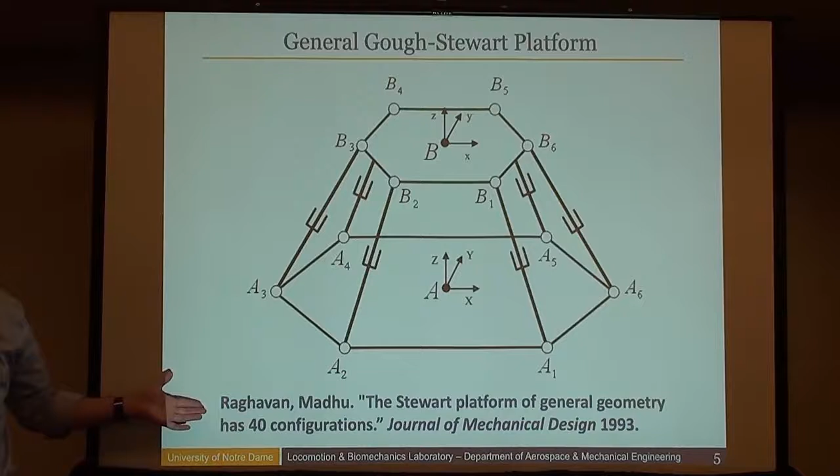So a very well-cited paper in our community, in the modern time, is essentially reduced to an elegant math puzzle. Planar synthesis of finitely separated positions - we've got up to 5 for a 4-bar linkage.

And linkages are great, right? If you're a kinematician, I love designing mechanisms. We're designing for irregular motion. If we're designing for regular motion, we don't need a traditional mechanism - you could do it with a single joint, probably.

And I think Anurag already got to this point of, how many applications exist where I really care that I exactly hit all 5 of these positions? The reality is, exactly hitting these positions is a convenient way of framing the motion generation or function generation problem, particularly a legacy way of framing it, because at the time we originally solved these problems, Freudenstein solved some of these problems.

We didn't have the computing capability that we have today, and so you needed analytical solutions. And analytical solutions are beautiful, and they're elegant, and in many cases they introduce insight to the problem that we wouldn't have otherwise.

And I'm not slamming exact position synthesis - I've done some work like this myself. All I'm saying is, if we as a community are going to require that we hit our positions exactly, we need to be honest with ourselves about what's the engineering benefit of that. And the engineering benefit ought to be, well, I'm designing mechanisms that are more clever or more interesting, or some other better approach that I get out of requiring exact position matching.

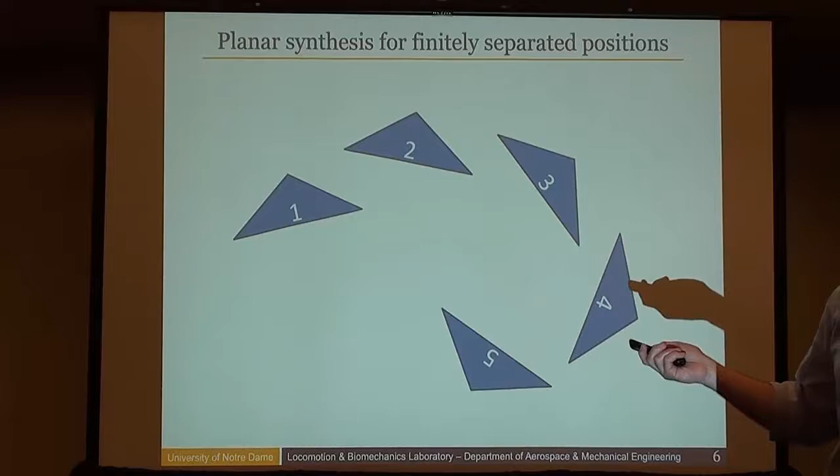Because with modern computing techniques, we can do approximate matching of positions and have 50 of these things and more tightly control the motion we want to generate. There are trade-offs in each of these cases. My argument to you is, in the constraints that you put on your design, make sure those constraints are serving the engineering problem and not just facilitating a math puzzle.

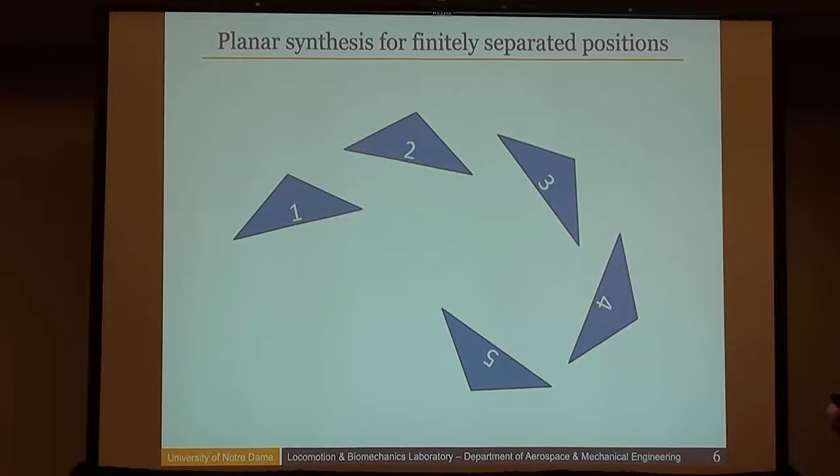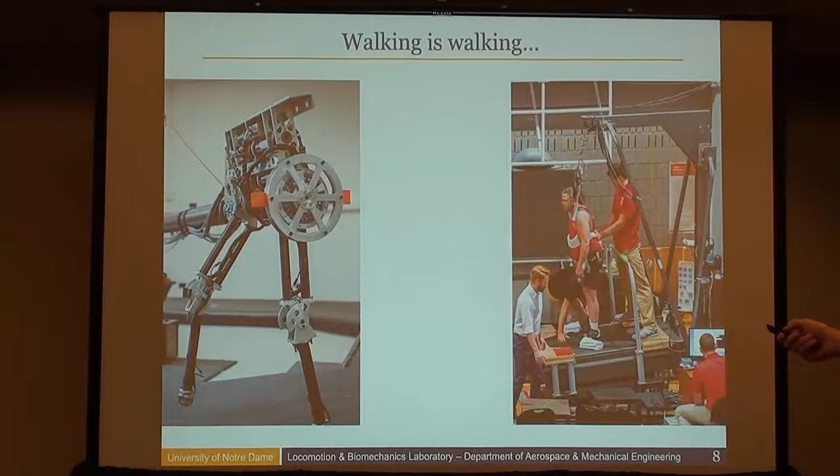Okay, so this is what I want us to think about - a case study within my own work that has nothing to do with mechanisms: walking. I happen to work on walking robots, and I happen to do some human rehabilitative walking, and I happen to work more recently on exoskeletons that nicely bring together robot walking and human walking.

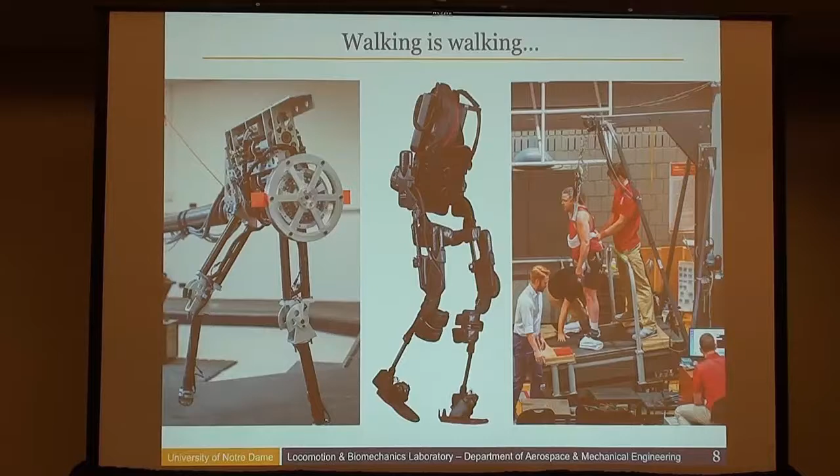And the bottom line is really, walking is walking. The mechanics of walking are what they are, regardless of whether you're dealing with a robot or a person - you're just changing the control system, in essence. And what's the engineering problem of walking? Well, why do we want to have legs?

Legs are good for uneven terrain. So if you don't have uneven terrain, your mobile robot might as well have wheels - or at least if you're not in a human-designed environment with stairs. And so the engineering problem of walking is locomotion over uneven terrain.

Now, it's true that all of us walked into this building and into this room, and the terrain is relatively even, except up here where we've got some cords taped down, etc. And so there are sections of the world that are perfectly flat. But if most of the world is perfectly flat, we should all be on wheels.

And the killer problem in walking is what Avengers gets right. I don't know about you, but I like it when science fiction gets engineering problems right. So the whole trick to Iron Man and the Avengers movies is this little heart fusion science fiction reactor that generates a ridiculous amount of power in a very, very small package. Because the killer problem for any mobile robot, but especially a legged mobile robot, is power consumption.

We want to operate on uneven terrain, and we want to not consume a whole ton of power. Those are basically the two fundamental challenges of walking.

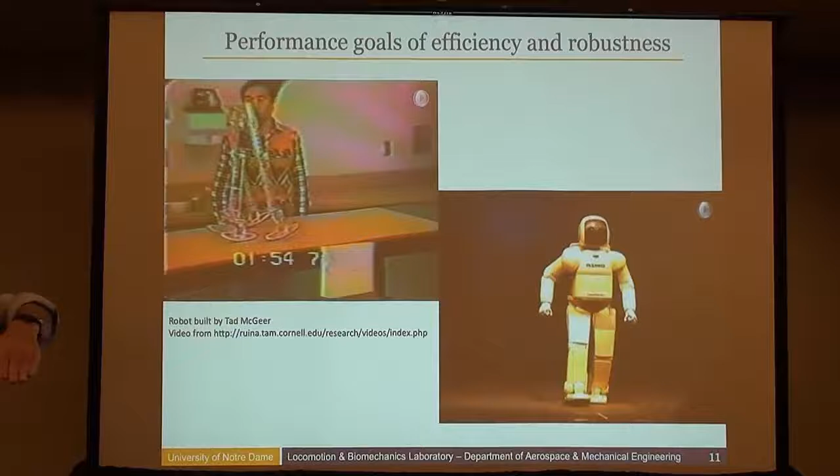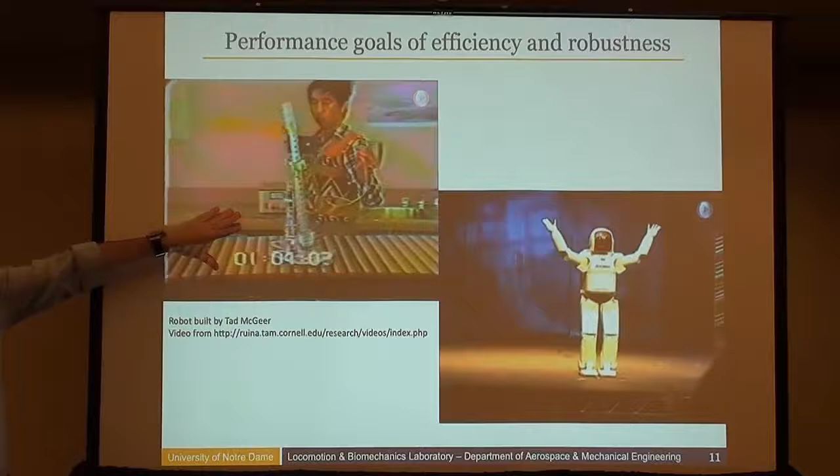History of walking robots: you've got passive designs like this, developed by Tad McGeer. Passive in the sense that they consume no power except walking down slopes, so they consume a small amount of gravitational potential energy. In terms of energy efficiency, they're about the best you can do, even accounting for the potential energy lost. Very, very efficient, but not at all robust. Their disturbance rejection ability is almost non-existent because they have no actuation.

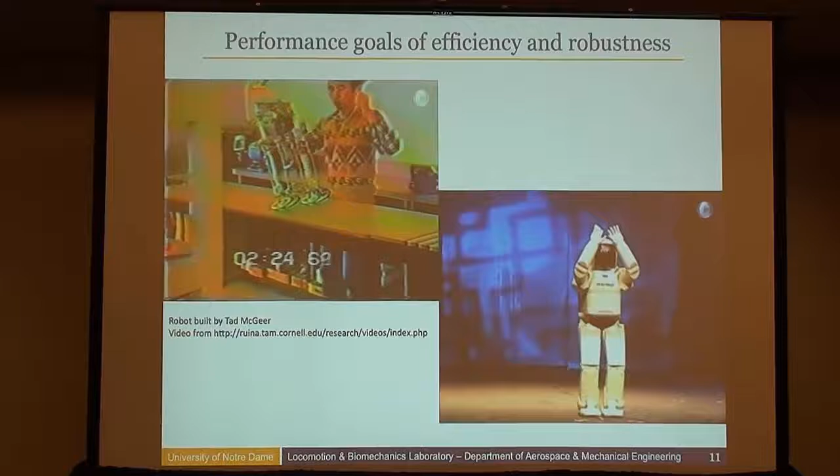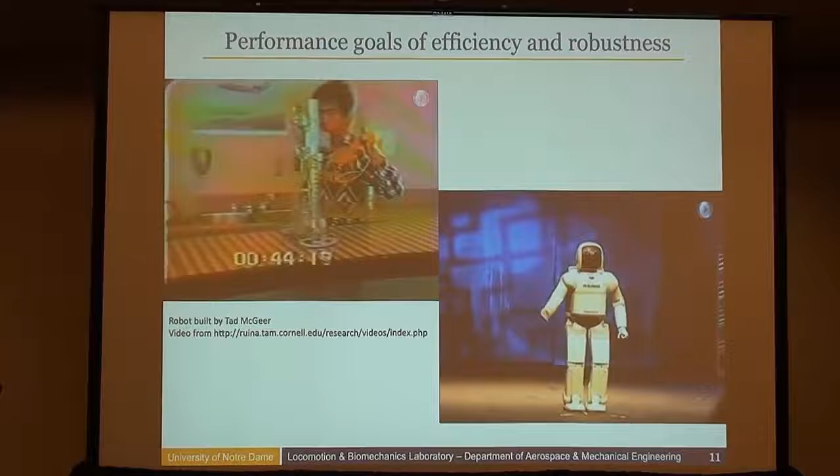In contrast, we have humanoids like ASIMO that are terribly inefficient, particularly compared to human walking, but much more robust than these designs because they've got powered ankles and can reject disturbances. So in terms of how these systems deal with the engineering problems of walking, we have the extremes: super efficient but completely not robust, and significantly more robust at the expense, to some extent, of efficiency.

So we have the passive and then the fully actuated. In my own research, what I've done, and maybe you can sense this from what I care to talk about today, is I'm a shoot-in-the-middle guy. Under-actuated robots have some actuation, but in this case no ankle actuation to provide a torque at the ground. My argument is shooting in the middle, maybe we can deal with some of the efficiency benefits of the passive systems and still get some of the robust benefits of the fully actuated systems.

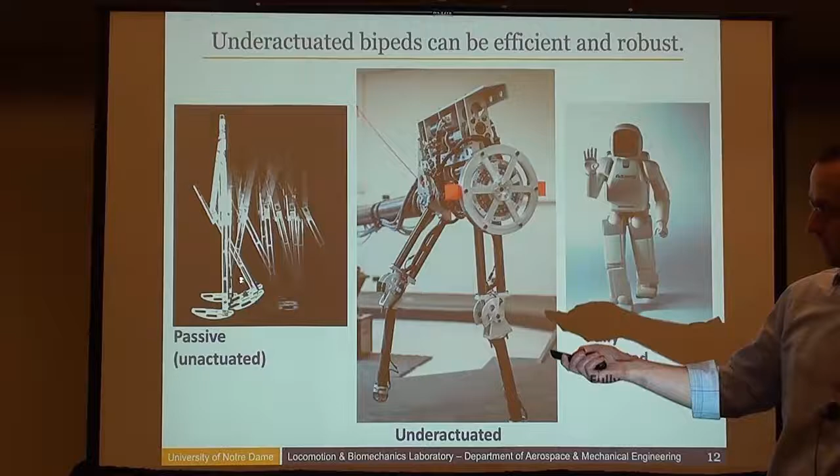The challenge on the robustness side is I know how to define stability relatively easily for a passive system. I can look at the Poincare return map of the inverted pendulum dynamics, and I don't have to worry about the control system, and I can tell you whether the system is stable. And if I have full actuation, including at the ground, I've got an actuator for every degree of freedom. There are a variety of ways I could design controllers that are guaranteed to be stable, or provably stable, within friction limits and actuator limits, etc.

So the challenge is, I'm a shoot-in-the-middle guy. When I'm operating with under-actuated systems, I can't directly use the method of Poincare for a passive system to analyze stability, and I don't have the actuation I would need for a fully actuated system. So I need some other approach if I want to guarantee robustness. And that's where I'm getting at with math puzzles in walking. I don't really care whether I guarantee robustness or not, I just care that the robot doesn't fall over and doesn't consume a ton of energy.

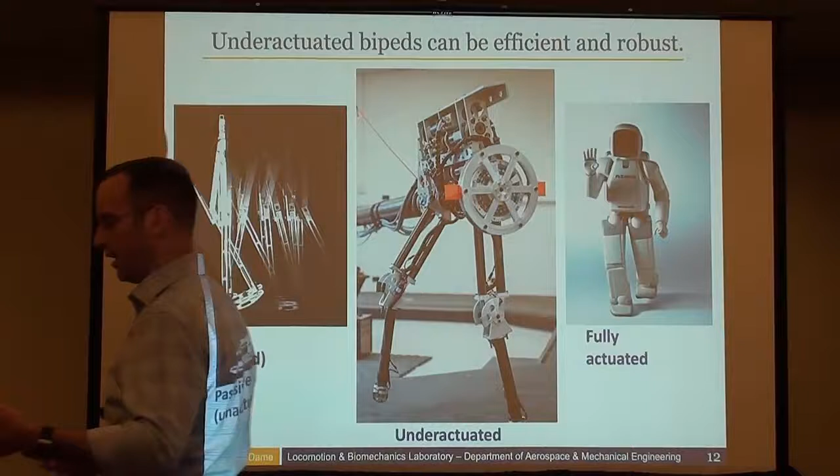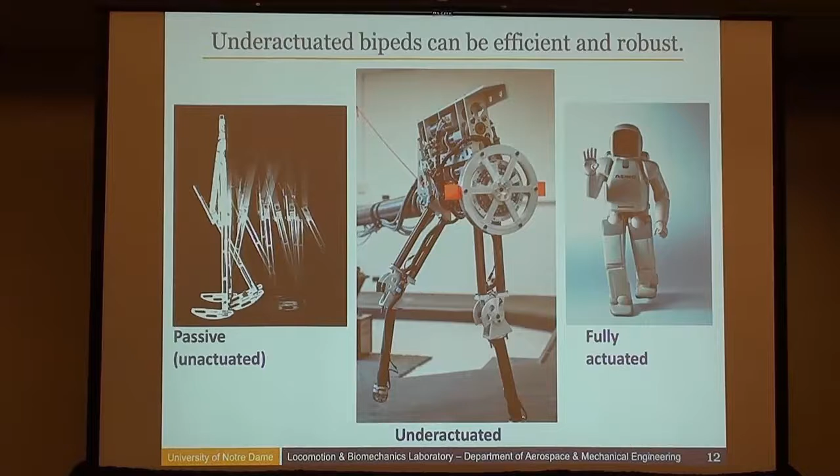But in the same way that designing a mechanism is searching for a solution that meets some performance criteria, in designing a controller I'm searching for a controller that meets some performance criteria. In this case, the performance criteria is the robot doesn't fall over. The math puzzle is, well, if I can prove my controller is stable, I've solved a math puzzle that also contributes to the engineering problem.

So I'm going to start with the math puzzle quickly, and then talk about how we use the math puzzle, but we reject the provable aspect of it, which I think is a similar case study to what we've used in mechanisms.

So, provable stability. Imagine I've got a 5-link biped that looks like this. I said if we had a passive system, I could analyze the stability using the method of Poincare. If I look at this red line from the point of contact with the ground to the hip, that's the passive part of this system. My robot here has actuators at the hips and the knees and no actuators at the ankle. So this theta degree of freedom is what I can't control, it's the unactuated degree of freedom. So if I just look at the red line, that's an inverted pendulum, and using the method of Poincare, I can guarantee stability of the pendulum dynamics.

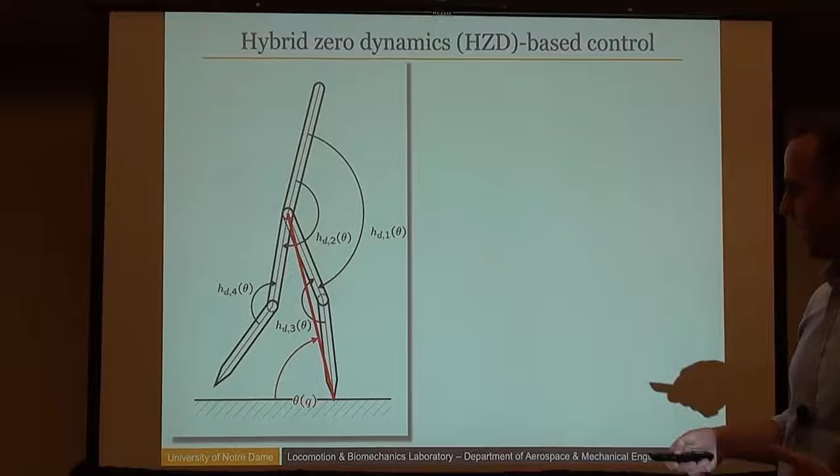So I take my control problem here, and this was originally developed by Jesse Grizzle's group at University of Michigan, and I basically jump through enough hoops to enable my actuated system here to be analyzed for stability only in terms of the unactuated element, the unactuated degree of freedom.

The way I do that is I assume I have continuous dynamics during stance, which is a pretty solid assumption. And then I assume I have instantaneous transfer of support when my new leg touches down, so I have no period of time where both legs are actually on the ground. I have an impact that changes support legs. That's a lie, right? That never happens in reality.

In the same way as when we design our mechanism to pass through five positions and we build it in hardware, it never exactly passes through the five positions. As soon as we go to the real world, there are deviations from the model. And so I have no robot that can instantaneously transfer.

But by enforcing an impact map, continuous dynamics, traditional form, impact map, change in velocities without any changes, instantaneous change in velocity without any change in position, I can achieve guaranteed stability.

So I jump through the zero dynamics. Basically this means, okay, if I have no errors at my hips or knees, so I control the shape of my robot in the air, the leftover dynamics are the zero dynamics. And those leftover dynamics are the dynamics of theta, that unactuated coordinate, how far the pendulum of the robot falls forward.

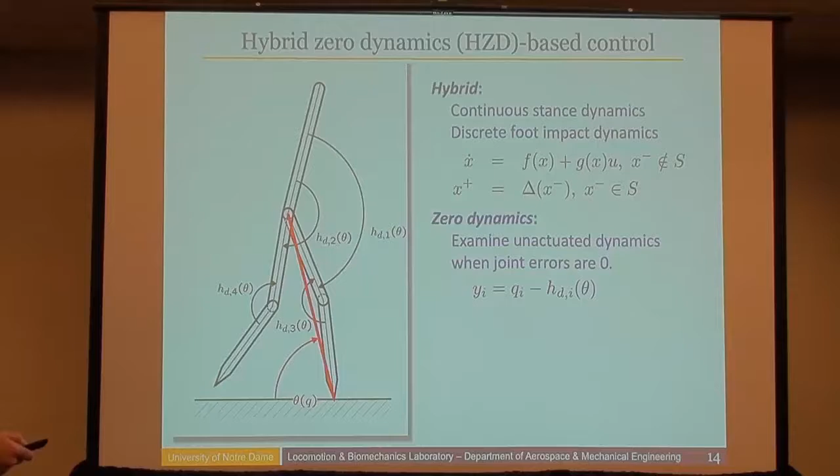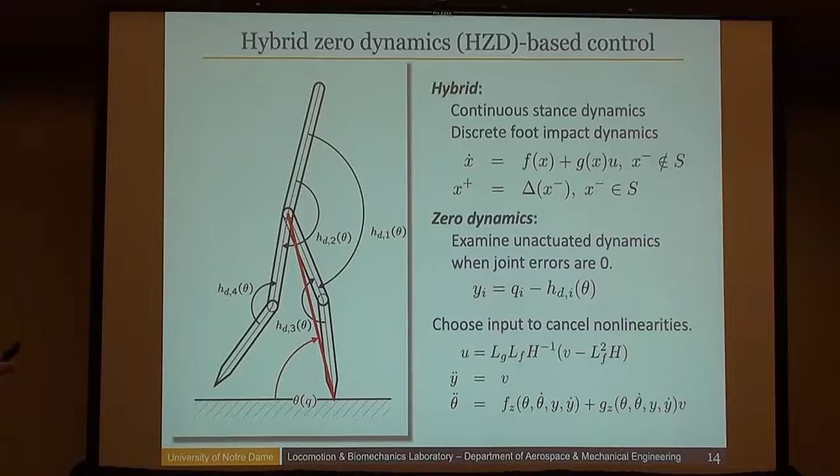And so what I end up controlling is the shape of the robot as it's falling. And if I control that shape reliably, the new swing leg comes in and touches down at the right position for the next step. And it's hybrid because I have this impact map that translates one stance leg into the next stance leg with each touchdown. And okay, we can do some manipulation to cancel the nonlinearities, and you don't really need to know about the mathematics.

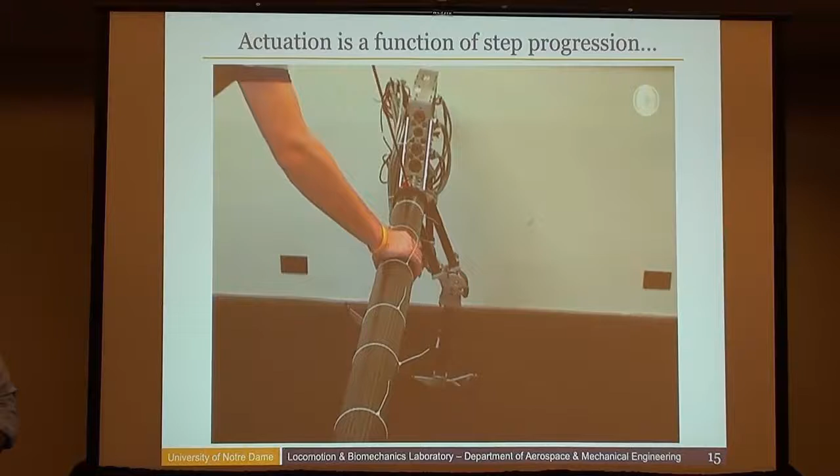The whole idea here is this: actuation is a function of step progression. So as the student pushes the robot forward, the hips and knees are modified to control the shape of the robot as a function of how far that inverted pendulum motion has taken, right? It's not a function of time. This is the same motion played on a clock as if it were a wind-up toy, which it's not.

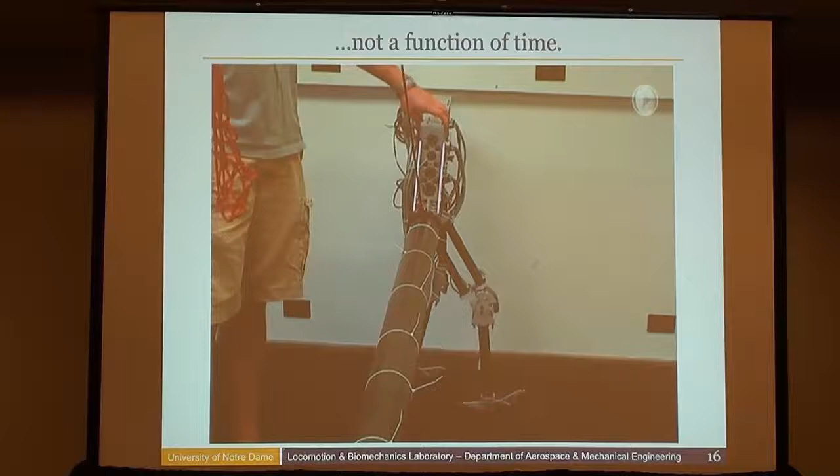And so with this, the idea is I'm analyzing the zero dynamics. So the zero dynamics, if I change the coordinate from theta to this xi parameter here, I plot the position and the velocity of that unactuated dynamics. And you can see here, this curve is the nice continuous dynamics while I'm on the ground.

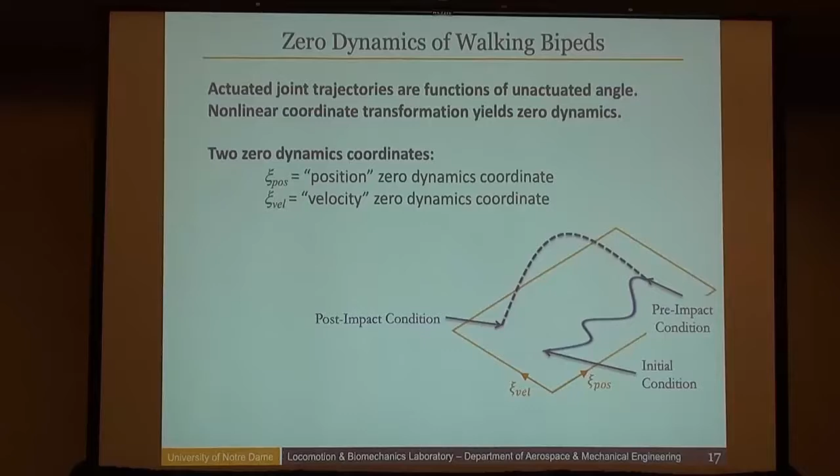And then I have a jump condition where I hit the ground and I have an instantaneous change in the velocity, and the change of position is reflected by the fact that now it's a new leg on the ground. And, okay, you don't really need to worry about all of this, but we go through the nonlinearities and we can make some provable statements.

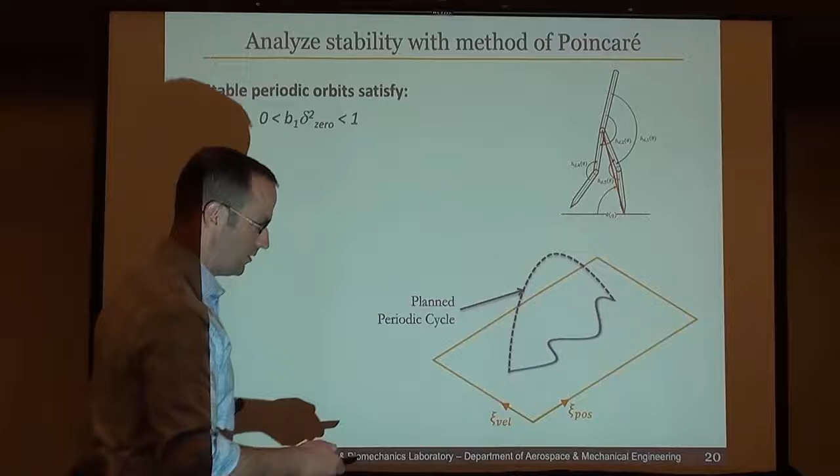And really the important part here is I've got algebraic map, yada, yada. Here's the idea: I've got a periodic cycle. So I take a step, I evolve on my continuous dynamics, my new leg touches down, I bounce back, and if it's periodic, I come right back to the position with the next leg, and I repeat.

And so the stability analysis that we're doing is, well, what happens if I start with an initial condition that's away from that periodic gait? So I'm in light blue now, and we see, I evolve on my continuous dynamics, and then I have my impact when my new leg touches down, and I bounce to a different location. And just as you would imagine, if you bounce to a location that's farther away from the periodic cycle, you're unstable.

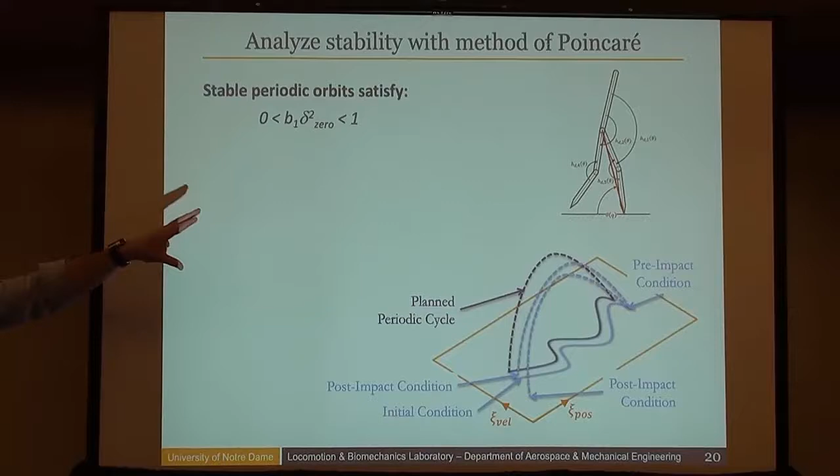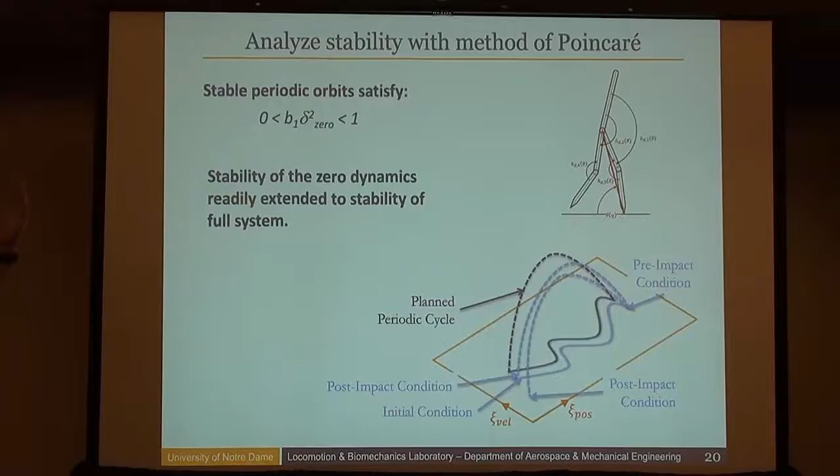Whereas, instead, if I were to bounce to a location closer to my periodic trajectory, I'm stable because my errors are shrinking instead of growing, right? And so we basically can go through the proof of how do I find gaits that enforce this stability under the assumptions of the model. And if I do, then I'm provably stable. And then I can project that provable stability for this simple system up to the full system, which is great.

And the result is something like this. So you can change the size and shape of the foot, and the robot walks in a nice repeatable manner, and you get provable stability.

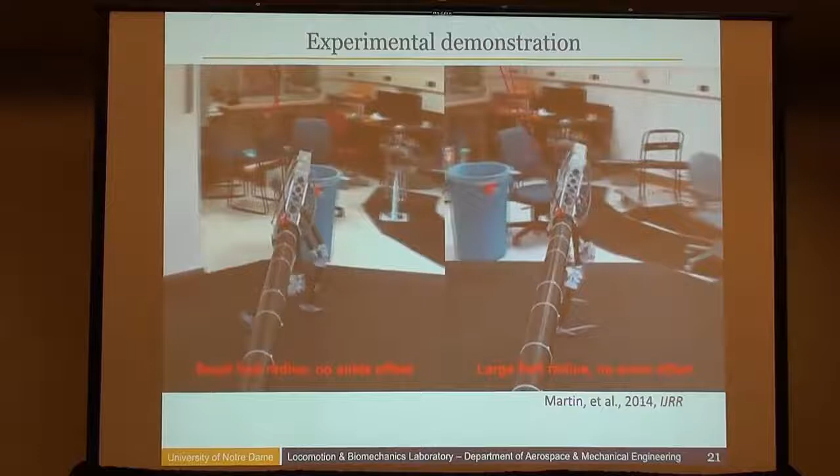Now, what I'm trying to tell you with all this is the hoops you jump through are the solution of a math puzzle. However, in this case, I find it to be a solution of a math puzzle that also solves a great engineering problem, because these controllers, when you put them on the robot, they just work.

And the solution space for all possible controllers that might work is quite large. And it's hard to know a priori, without provable stability, whether they'll work or not.

Here's the problem. I argued to you earlier that the whole point of walking is to be able to walk on uneven terrain, right? As soon as I'm on uneven terrain, I've lost provable stability. And so this idea that a provably stable gait is great because it works - we want it to work as well, and it may be the first cut at a controller that works on uneven terrain.

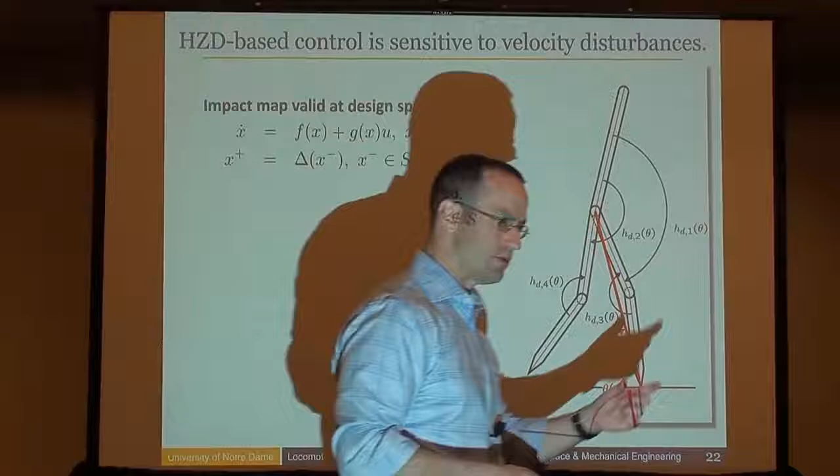But because of the way I frame it, the control strategy is very sensitive to velocity disturbances. Because I designed the gait assuming I'm walking at a very specific speed such that the impact map that represents my transition from support of one leg to the next is valid. If you slow down, that impact map is not valid anymore. And you have no control necessarily over whether the gait will proceed or not. So if you run the experiment in the lab and you put a barrier there and you slow the gait down, the robot risks falling over.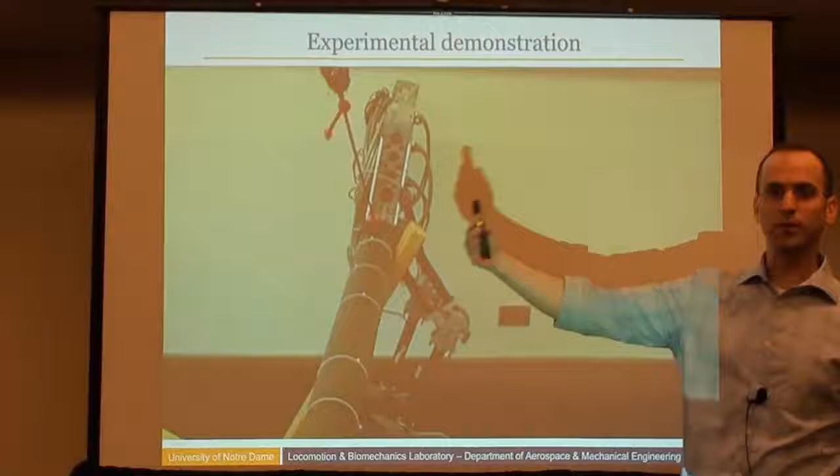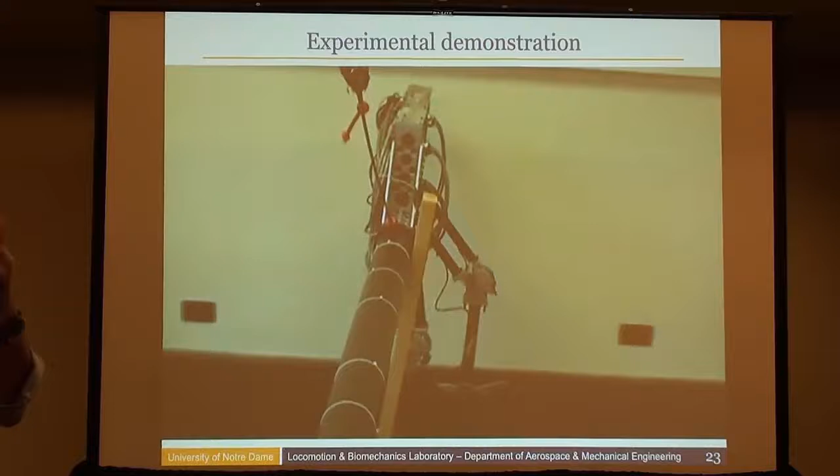And in the slow-mo, what I want you to see is it doesn't fail on the first step. So here's the contact. It completes the next step, but it's on that step that it's moving more slowly than the gait is planned for. And as a result, it can't finish. So it hits the barrier, it takes one more step, and then it can't complete the step after that because the impact map that we assumed is invalid in the presence of this disturbance.

The reason for this is basically there's no feedback on theta dot. There's only feedback on position.

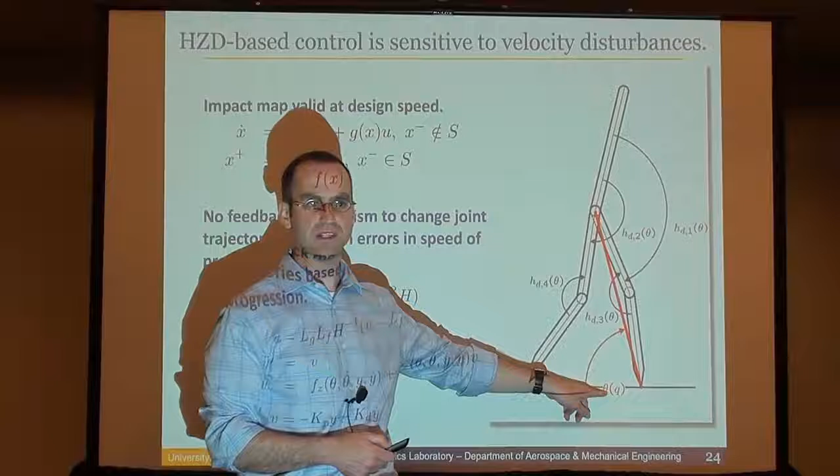Well, we can solve - which drives us to solve - a different math puzzle, which is great because I'm not particularly good at this, but there are people like Russ Tedrake at MIT and now Toyota Research Institute who are really good at this, and Ian Manchester in Australia.

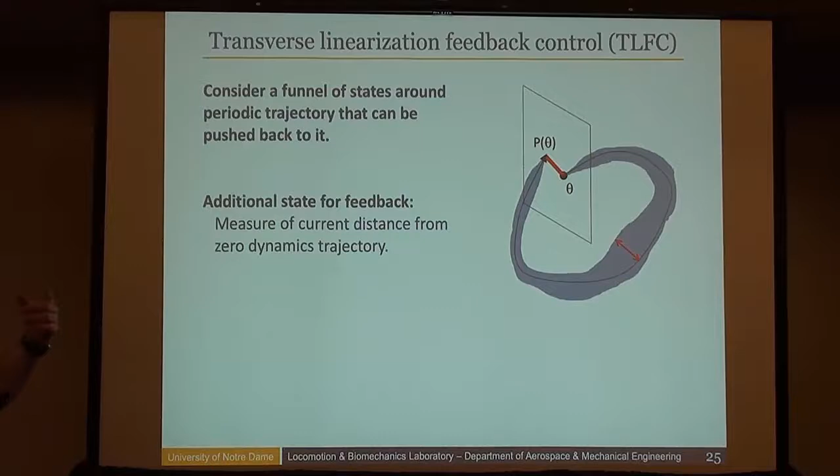And they developed this idea: why don't I provide feedback on the unactuated velocity as well as the unactuated position? So basically now you say, okay, if I think about that trajectory, there's actually maybe a funnel of underactuated states along that trajectory where I can drive myself back to the trajectory, and I just need some feedback to tell me where to go. And so you can do that - and this isn't terribly important - but you're looking for the distance in the theta, theta dot plane, the distance where you are from, say, that periodic trajectory. And that distance we're going to call I.

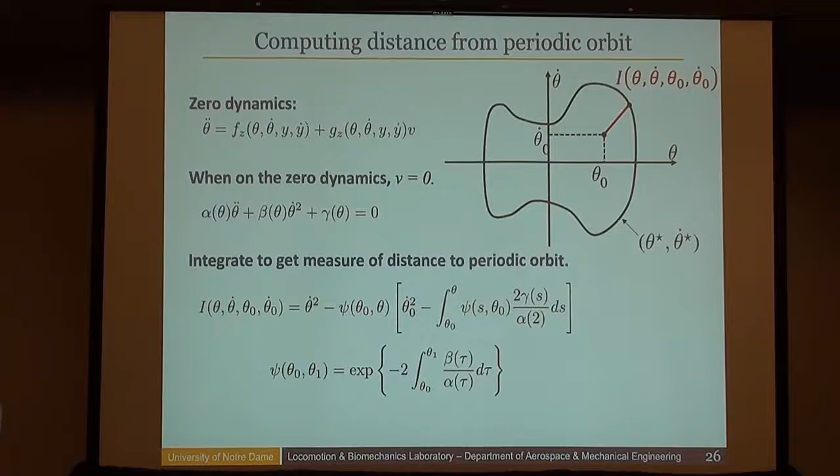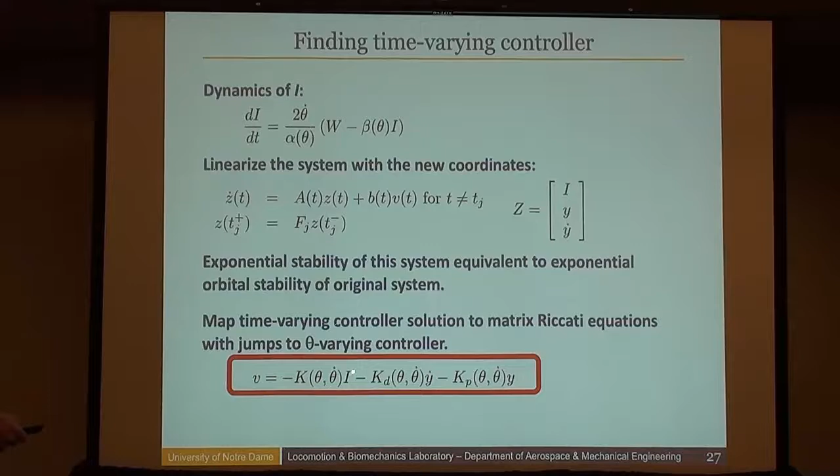And if we have feedback on that, well, now I can solve the more complicated math puzzle of how do I guarantee stability even in the presence of these velocity disturbances, which is great. And so, okay, we jump through, we can do it. And so now, where we had previously just a PD controller, we have a PD plus - and I is not an integral term, so it's not KI. We have a feedback on that.

But that is getting into the realm of truly math puzzle type solutions, because even with the computing power we have today, there's no ability to do a real-time computation of these gains, or even this integral distance to calculate the distance I. You simply can't do it in real time for anything other than a two-link biped. And that's a toy problem. It's a great toy problem. People have built - Tedrake built a two-link rocker that walked beautifully with this controller. But it's never been applied to the experiment, even a three-link biped, let alone a five-link, and that's like on a boom, so we've got to get to 3D.

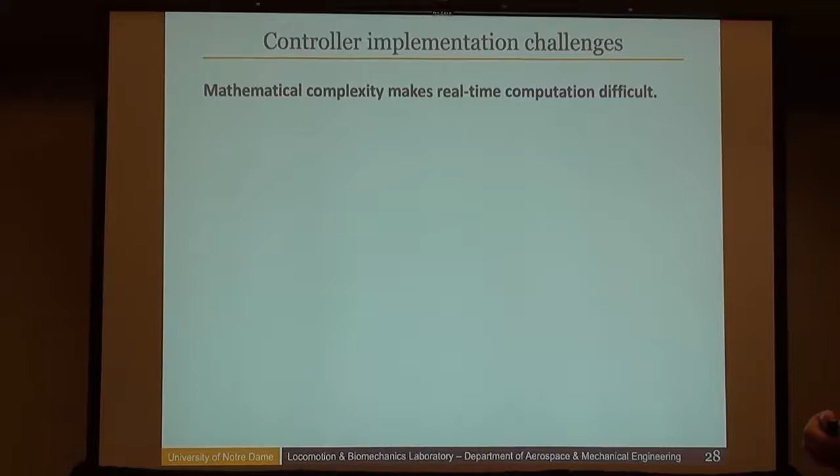Plus, we've got gain scheduling, which means if you don't have a perfect model of your system, your simulated torques aren't going to be exactly the same as your experimental torques. And so now it heightens the importance of your system ID, which is inherently limited, particularly as your robot gets more complex. And then you've got to measure the zero dynamics velocity, which is an unactuated velocity, so you're going to use an IMU or some other remote or non-contact sensor, which means you're basically going to use an observer to get it, and it's noisy.

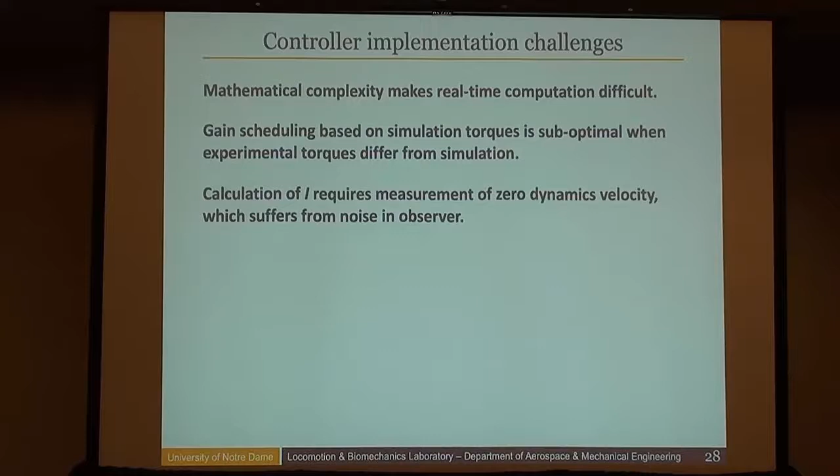Long story short, great math puzzle, cannot implement it in engineering practice. But my argument to you today is that math puzzle is actually really instructive for solving the engineering problem, because you can simulate it all day long, right? You don't care about the non-real-time calculations, so you can simulate it. And so what you do is you say, well, okay, what does the trajectory of the torso do under this control when I have velocity errors?

So in this case, you take the solution of the math puzzle, you simulate it, and you extract from it, well, what's the controller doing? And how do I approximate that with a heuristic?

Well, first order approximation of these changes in trajectories are really pretty easy. So we take the provably stable controller for what it's worth, and then, if you're a jazz fan, I would say we improvise on it. It's the melody of the song, and we do our improvisation on top of that melody. And in doing so, we've lost provable stability.

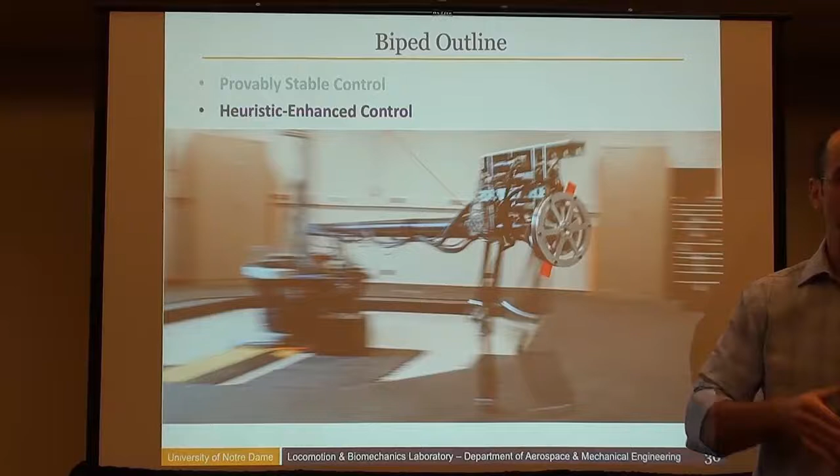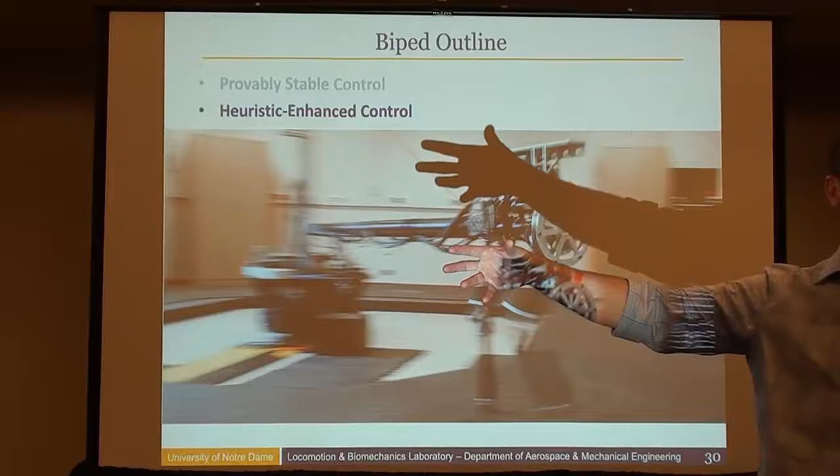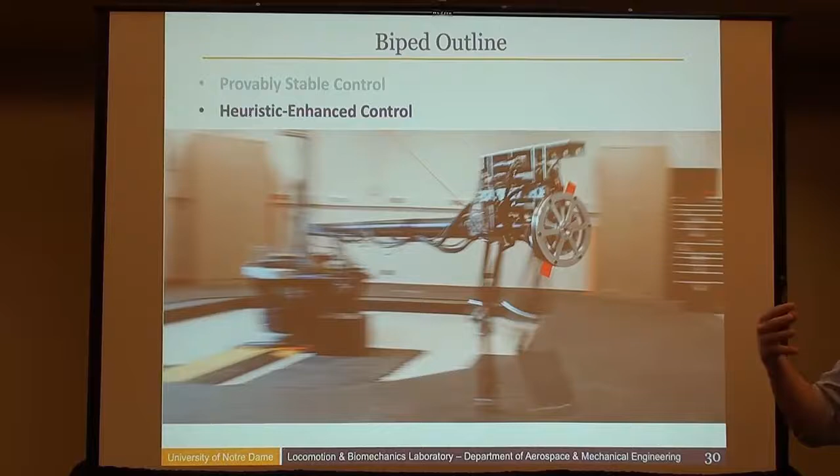In the same way that perhaps in a kinematics problem, we've lost the ability to exactly match precision positions. But I don't necessarily care about exactly matching precision positions. I care about generating the motion that I want. And precision positions might be the handy way of constraining that motion, but as I think Anurag talked about, relaxing some of those positions to get the actual motion that you want, the same thing is happening here.

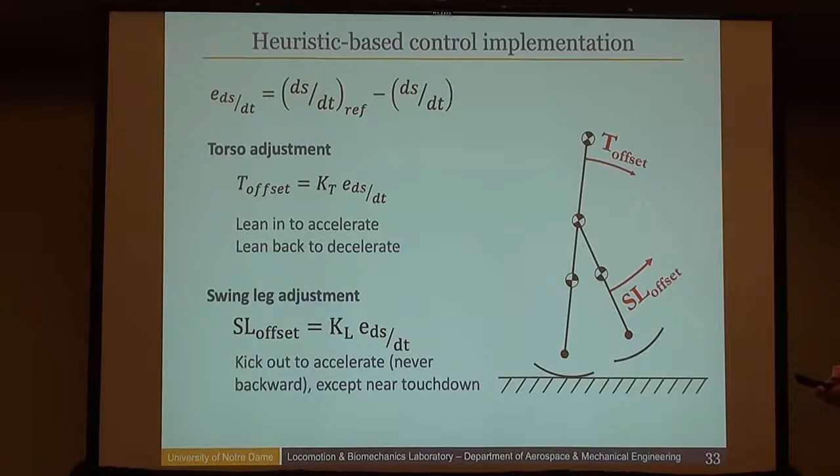So, okay, we solve a different math puzzle to find out what's the feedback that's most useful. You don't really need to care about this, but basically, if we're going too slow, we lean forward and kick the swing leg out. And if we're going too fast, we do the opposite, but we never kick the swing leg backward because the swing leg's always got to come forward at some point to touch down.

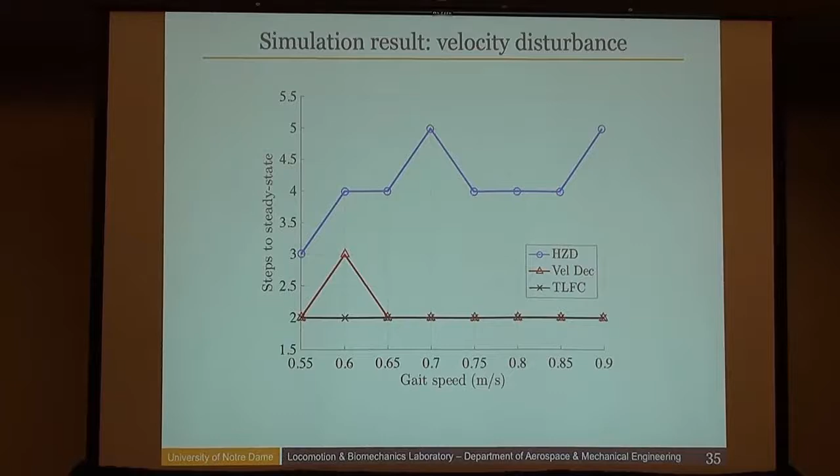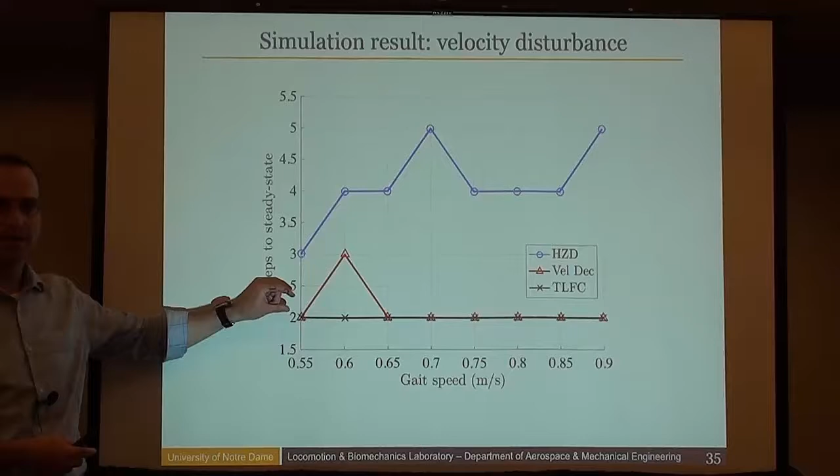And if you want to look at how does it compare across gait speeds, it's the same story. HZD is the worst. Ours is somewhere in between. And the provably stable one here is the best. So what we're doing is we're saying, well, I'm going to seed my control design problem with the principles of the solution to a math puzzle. But I'm going to relax the constraints that make that a perfect solution to get myself a practical control.

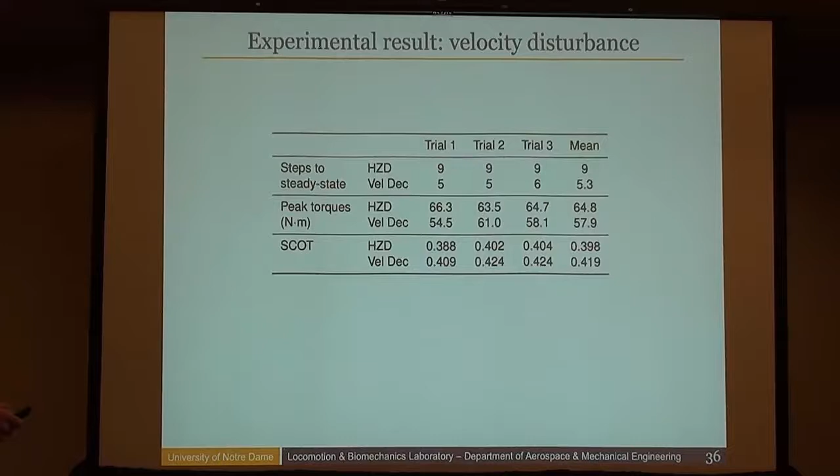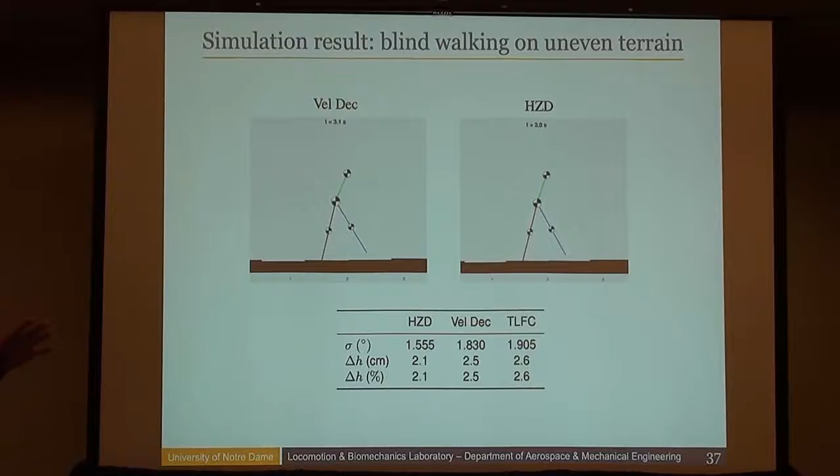Uneven terrain is the whole purpose of legs, right? So the idea here is our new controller is the velocity decomposition controller, and it can overcome stochastic terrain, where you imagine you don't have a vision system that tells you what the height of the terrain is, or you do have a vision system that has a certain amount of error, which is practically always going to be the case. And by improving the torso and leg regulation in light of these disturbances, based on a math puzzle solution, but not formally implementing it, we get better performance.

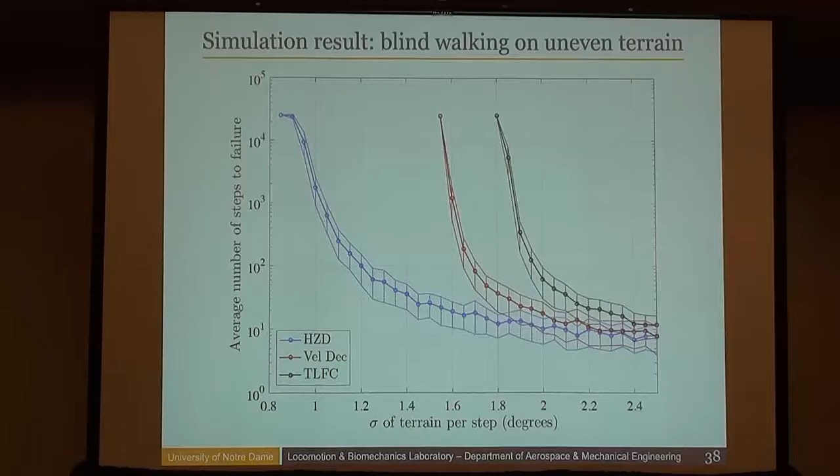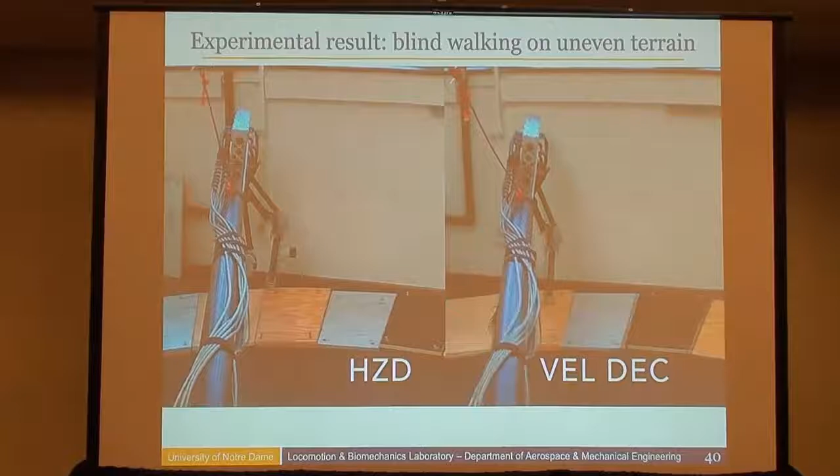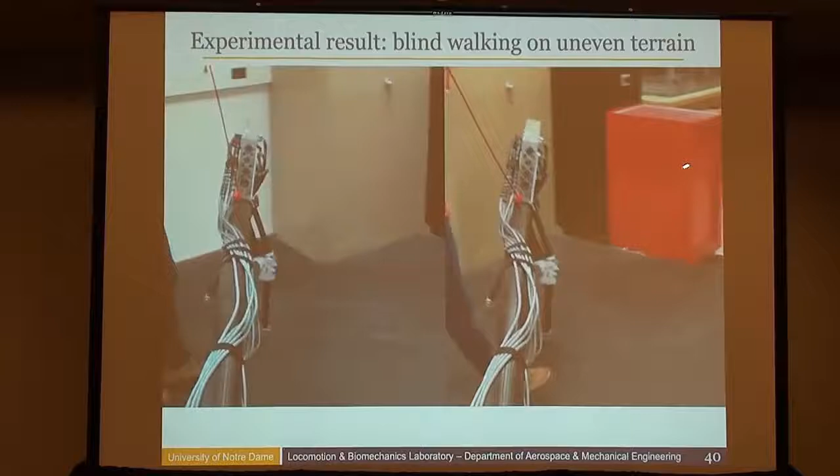And we tried it on different terrain heights, so here's some videos of this, HZD and our approach. Keep in mind, transverse linearization feedback control can't be implemented in hardware. And so what you should be looking for here is there's a red tool chest, and the velocity decomposition hits it much faster, hits it earlier because it rejected the decrease in velocity associated with the steps better than the traditional.

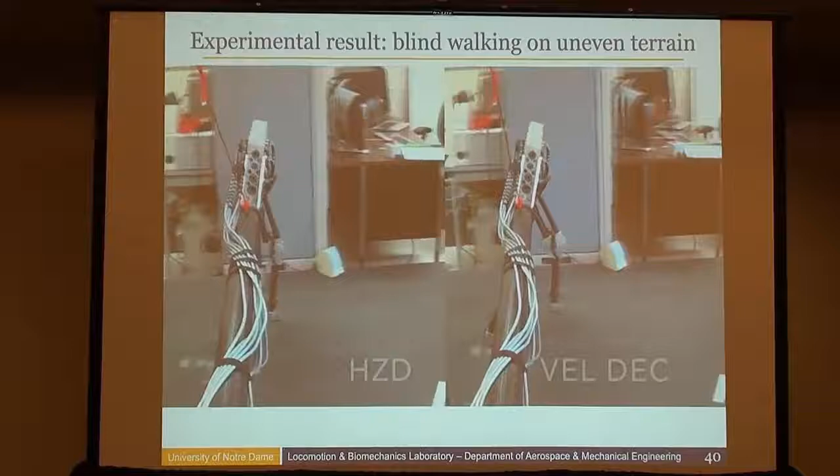If we increase the elevation of those steps, we get to a point where the hybrid zero dynamics controller fails and our better one keeps going.

And if we randomly throw down sheets of terrain height variation and different stiffnesses, again we see the enhanced controller is stable, and it's keeping the desired speed much more reliably than the traditional controller. And you pay for cost of transport.

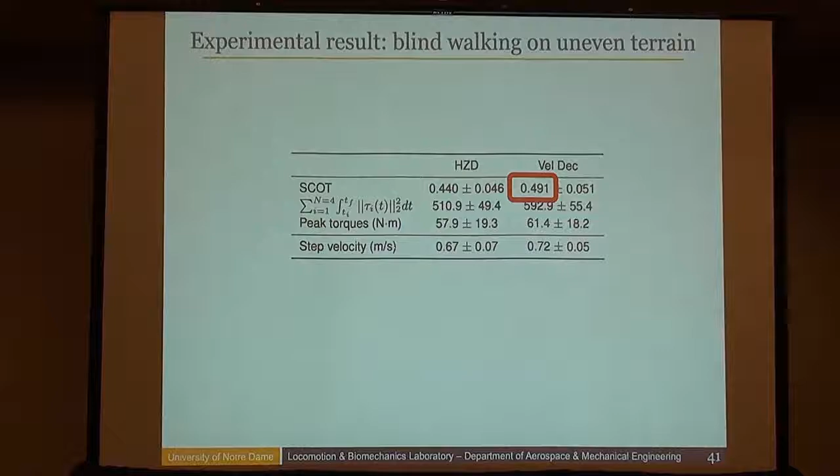So my argument to you is not that math puzzles are bad. My argument is, at least in my experience with walking, math puzzles are really useful up to a point. And where we get into danger with math puzzles is when we're emotionally tied to them such that we're not willing to relax the constraints that allow us to get the solution and use it to inform a real engineering problem.

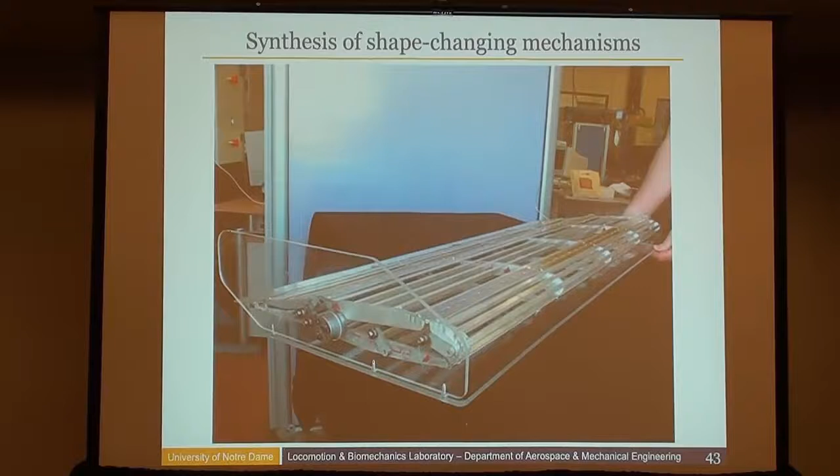All right, so optimization-based synthesis. So how do I do that? Mechanisms. I've been interested in these shape-changing mechanisms for a while, primarily because I think they're a real engineering problem, and that's debatable—you might argue with me. I'm interested in solving them both with rigid bodies and with compliant mechanisms, what have you.

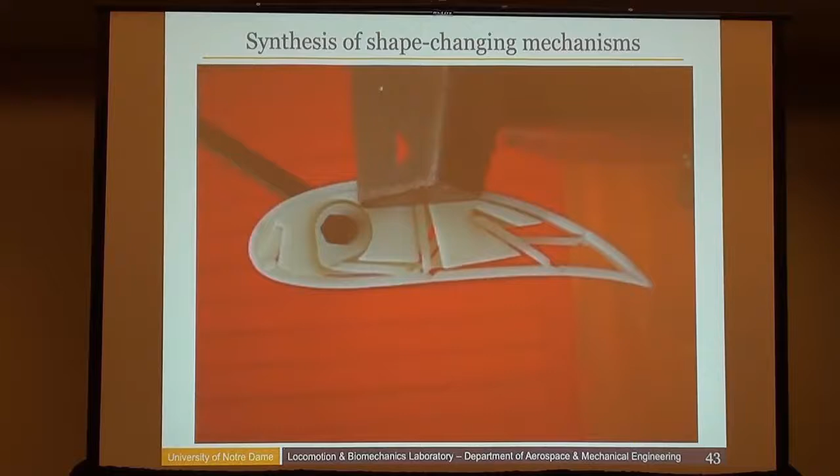And the strategy we've been using has basically been optimization. We don't exactly match any positions, we're just trying to do good enough, and optimization is a handy tool for that.

Specifically, we went to some trouble to find rigid body procedures, and then asked how do we convert and use that rigid body information, because that seems like a lot of information we get—I was talking about the value of data. If we know rigid body solutions to a given problem, that ought to tell us something about the compliance solutions. So we've tried using pseudo-rigid bodies to do partially compliant mechanisms, since that's a pretty logical connection between rigid body and pseudo-rigid body models.

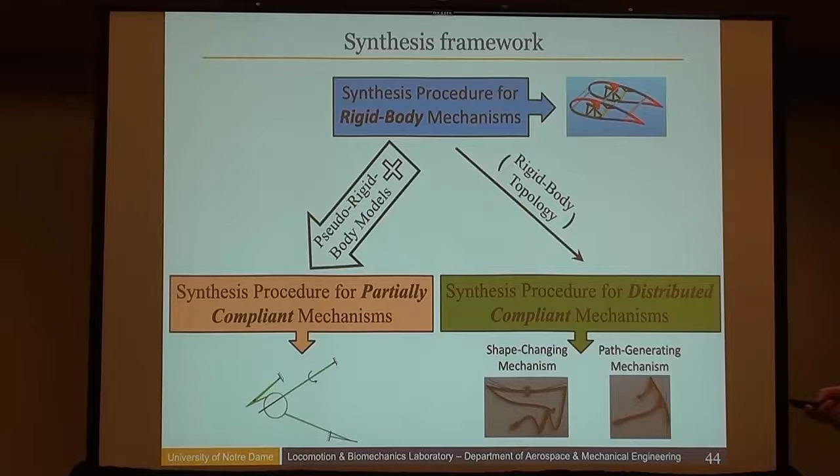We've also used these to generate fully compliant mechanisms. From a rigid body synthesis standpoint, to some extent there's a math puzzle: if I want to match this surface of the mechanism, the green surface, to change its shape, it's possible that surface is entirely in the body of the mechanism with no ground pivots, like an open curve. It's possible it could be a closed curve as part of a mechanism—we looked at morphing dies, so maybe plastic flowing through the middle, or if this were an aircraft wing, fluid flowing around it, and all these links have to be inside.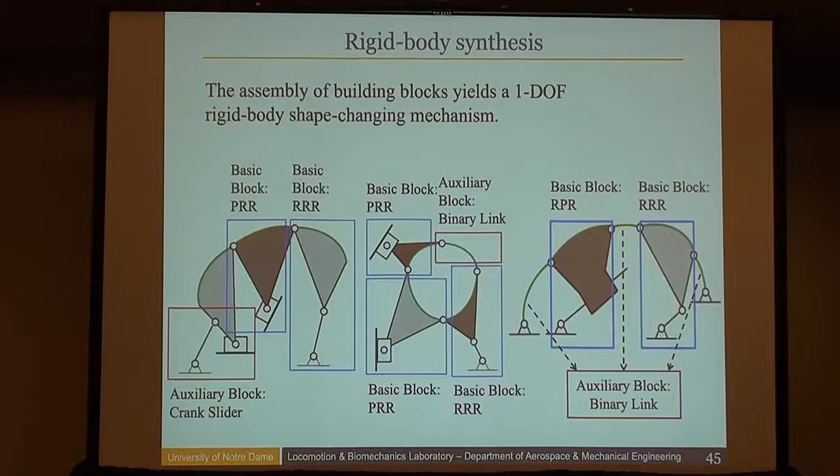But then it's also possible that green surface I want to match is actually jointed to ground. So we looked at this as a math puzzle, sort of a combinatorial math puzzle: what are all the possibilities that allow us to do this?

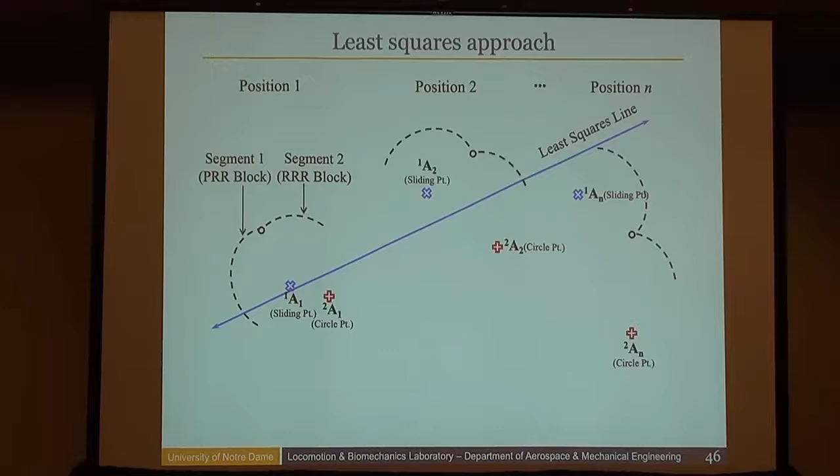In our experience, if you've got 2 points, 2 positions you want to match, and you want to put a slider on, it's pretty straightforward. Then if you want to add another dyad, you can find the center point. What we found was, as soon as we went to 3 positions—3 shapes we wanted to match—we never found good solutions for a slider with 3. So we always just said, okay, least squares solution with 3.

There are solutions—we know as kinematicians there are solutions where I can find points whose 3 positions lie on a straight line. But we found that restricted the design space so much we never got defect-free mechanisms out of our optimization. It's possible they existed, but we never found them.

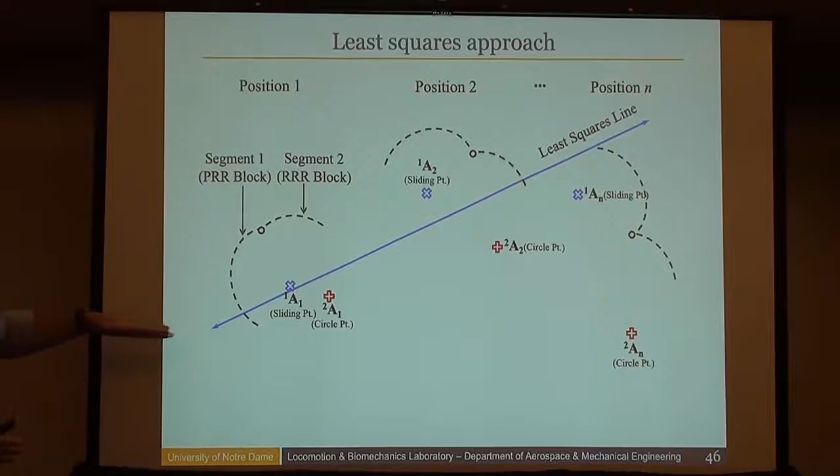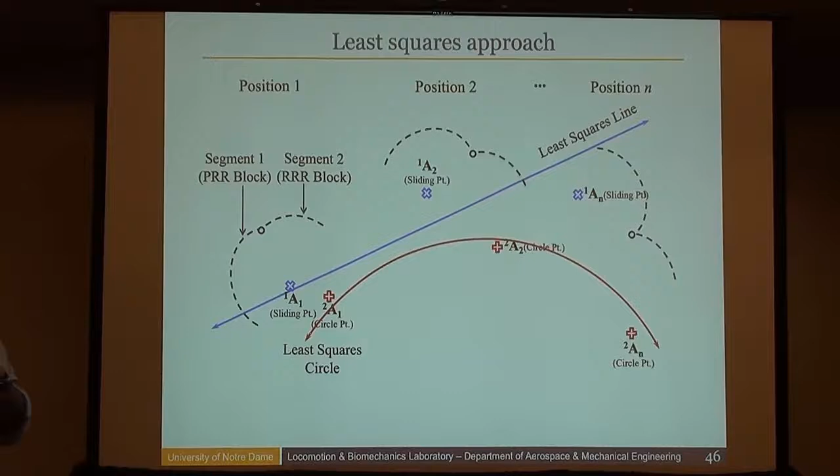So we punted—we said who cares about exact matching, if we have three or more positions we're just going to fit a least squares line. The same thing happened with circle points: with 3 you can always fit a circle, but when we got to 4, we never found good solutions when we constrained it to exactly match the 4. We over-constrained the design space because we were trying to exactly hit them, so we punted to the least squares approach, and it works fine.

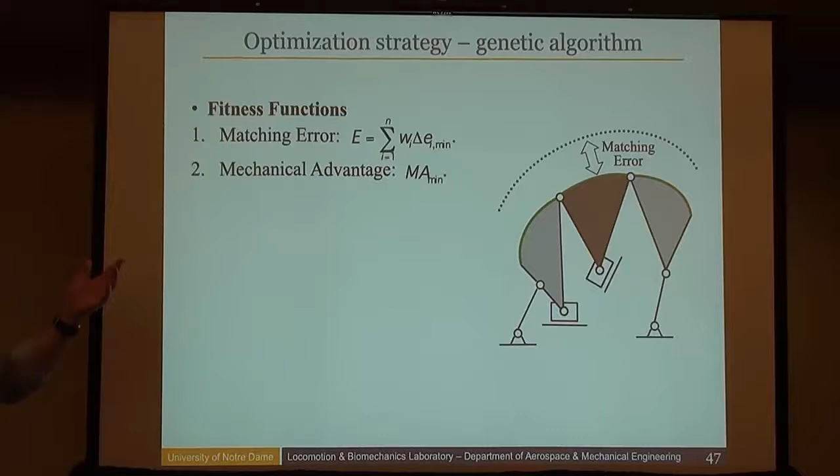So we chose at the time a genetic algorithm, but maybe we'd use machine learning now, or particle swarm optimization, whatever your favorite optimization tool is. We minimized matching error, but we also thought about mechanical advantage—how much torque you need from your actuator to resist a load—and that's convenient in any optimization framework. So we chose our GA to have a chromosome that contained all the information in the design. That's great.

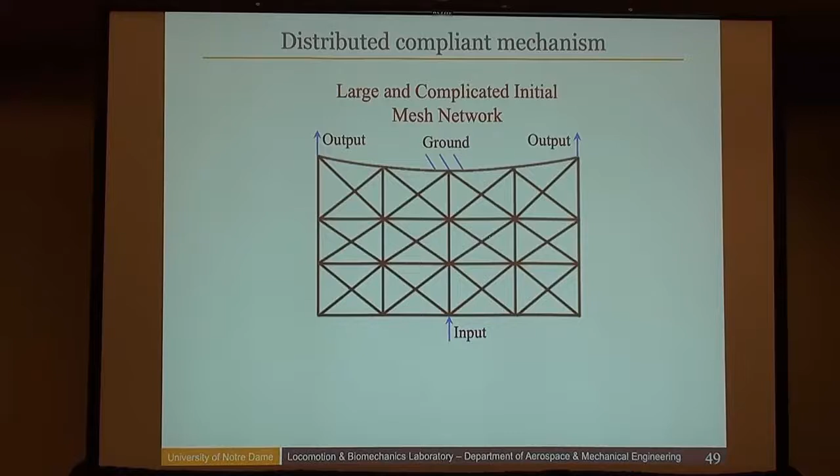We basically discretize the design space so finely that we rarely allow the node locations to move, because it becomes an overwhelming optimization problem if we have a huge number of variables and their positions are changing. As you get more and more of these, not only does the computational cost go up, but now you risk converging to a local minimum.

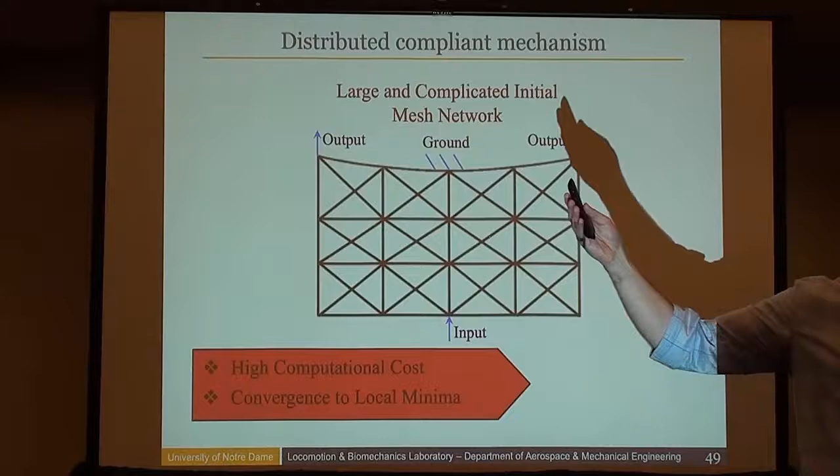My argument in the abstract of this talk is that there's never going to be enough computational power for us, for the kinematics community. We're never going to be happy with what our electrical engineering and computer engineering colleagues give us in terms of computation. It's just never going to be enough. We'll always find ways to make more use of it.

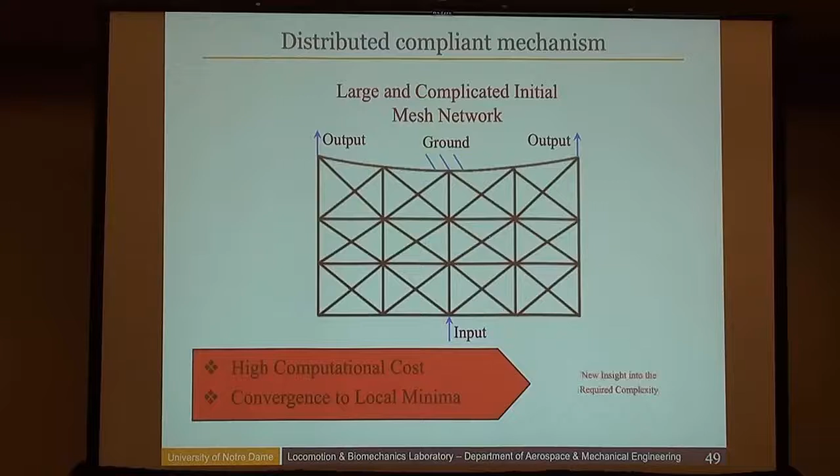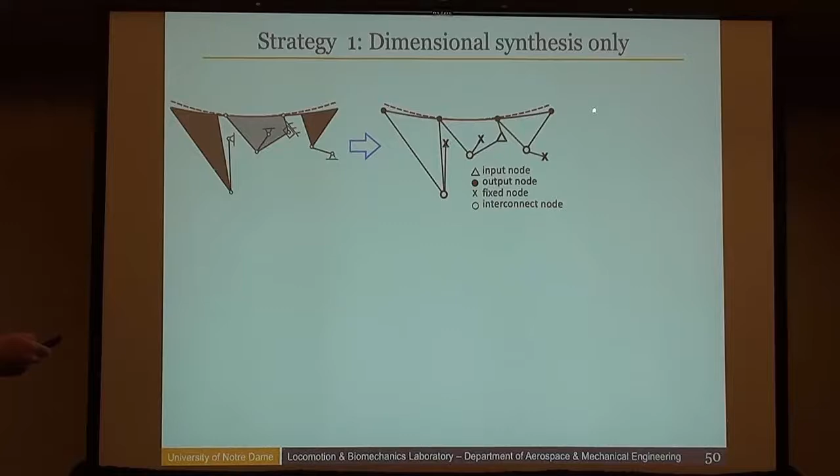So what we tried to do here was say, okay, we know a lot from rigid body synthesis. Why don't we just take that topology and call it a compliant mechanism, as if it were a pseudo-rigid body, and find the values of the beam length, beam shape, and cross-sectional design that match the same topology but are now compliant.

And so, yeah, that works fine. We basically look at a bunch of topologies of the rigid body, and then we convert each of those to a compliant mechanism. You make it a two-step process. It's better though, if instead of having this complex network for a compliant mechanism, you just take the topological network from the rigid body solution and make that the initial mesh of the compliant mechanism.

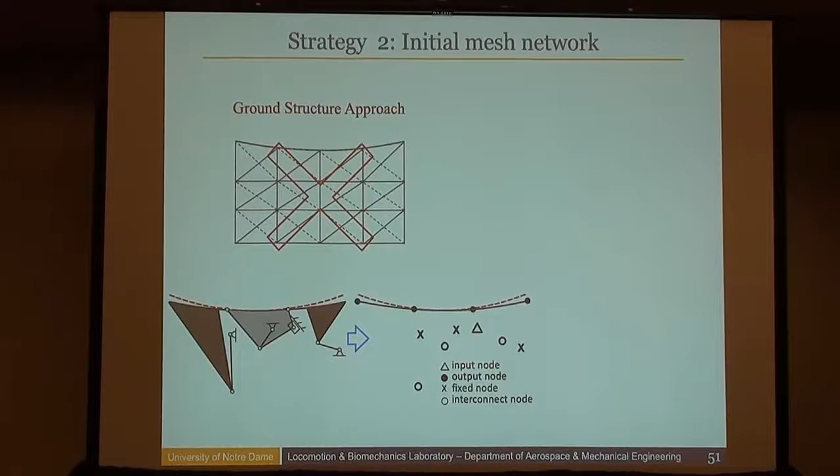You've thrown out a ton of possible solutions, but you've gained more flexibility in other cases because now you can allow binary variables, so not every one of these links has to be present. You can allow them to disappear. You still have the ability to control beam length, beam shape, and cross-sectional dimension.

So ultimately, by taking the idea of what's the topology of a rigid body solution that does pretty well for this particular problem, using that to generate the compliant mesh network, and then using that smaller mesh network with fewer design degrees of freedom, but maybe better resolution, to generate a better solution. There's no math puzzle here, right?

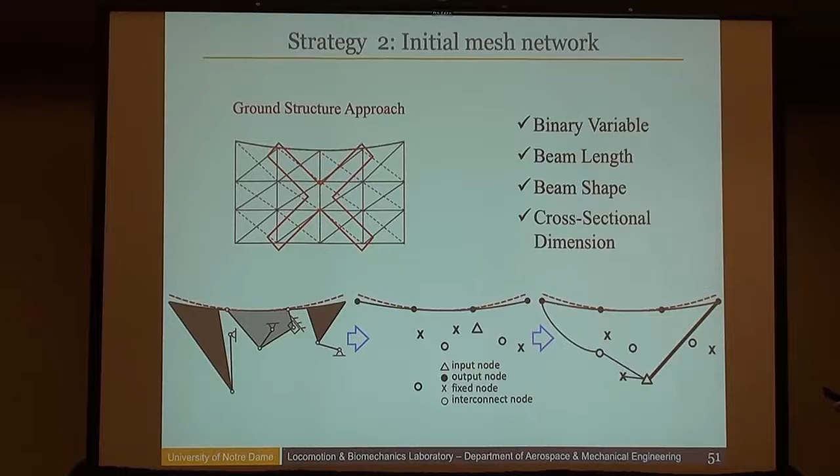We basically jettisoned all of the math puzzle pieces of this. It's not elegant. It's not insightful beyond the idea that the topologies of the compliant mechanism and the rigid body mechanism actually share some understanding of the problem.

And so you have to jump through some hoops, you have to solve some other math puzzle to get rid of the disconnected topologies and the invalid substructures so you're not searching invalid solutions, which Anurag talked about. You feed the machine learning algorithm the defect-free mechanisms already. So there's some interesting kinematics there to be done.

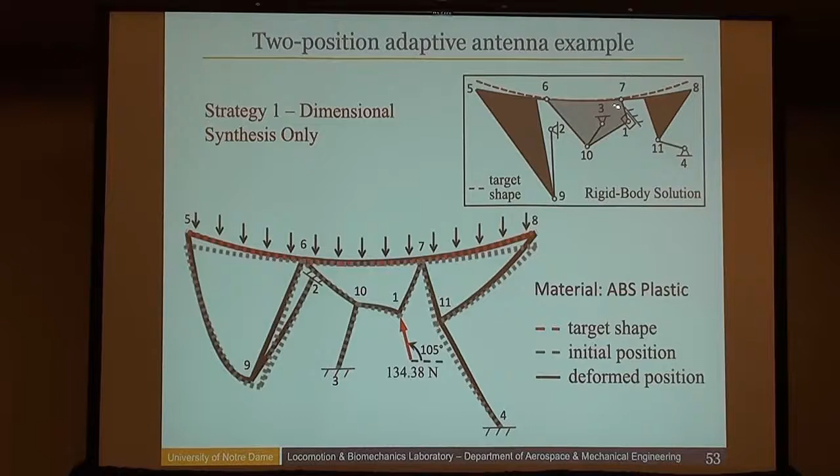But ultimately, if we don't allow the topology to vary, we get a complicated mechanism. We actually get a much better performing and simpler mechanism if we shrink our design space from the complex mesh network, informed by what we already know a priori about the problem.

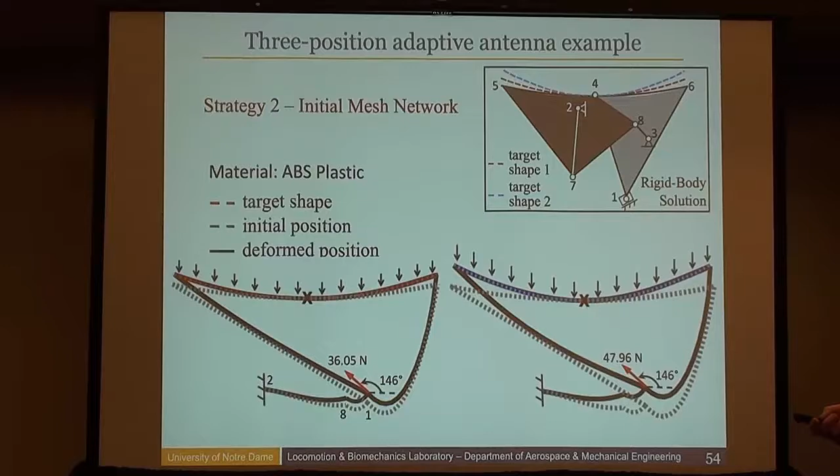So that's what I'd originally planned to talk to you about, is why I think searching the design space, even as our computational power improves, shrinking the design space often leads us to better solutions if we shrink it in an intelligent way.

But then what I ended up wanting to really talk about was, are we solving math puzzles? To some extent, you could level a critique that some of what I presented today was solutions to math puzzles. Math puzzles are great, they're fun, I like them. Sometimes they overlap with engineering problems.

But that's where I think we as a community need to focus our effort, where they do meaningfully overlap, where they do at least have potential to overlap. And I think we need to let go of some ideas that over 30 years haven't shown the overlap that we hoped they would.

That's all I have to say.

Thank you for that fascinating talk, Jim. I think it was a good closure because yesterday we started with walking machines by Professor McCarthy, and today we are ending it with walking machines. And before we walk out of here and close this summer school, there are a few items on the agenda.